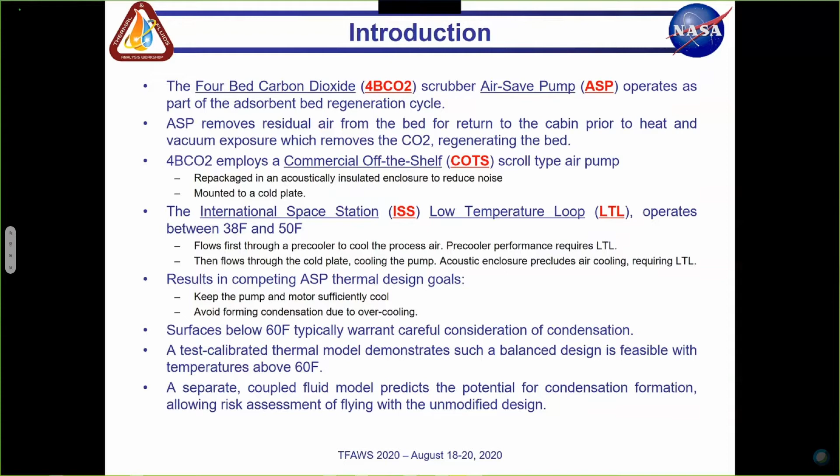We developed a test-calibrated model and used that model to investigate design changes to find a balance between those thermal goals, and did find it. And then finally, we did a condensation analysis to predict how much condensation could be formed by the pump under worst-case cold conditions.

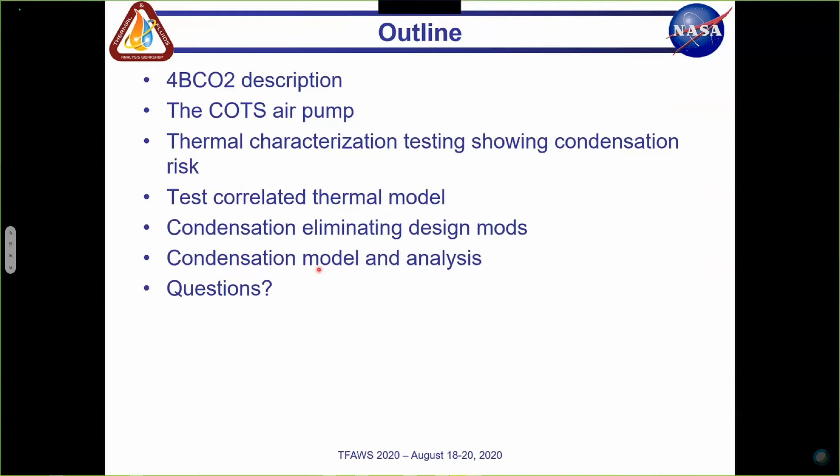So, as an outline, I'm going to show what the 4-bed system is and how it works very briefly, and describe the off-the-shelf air pump, then the characterization testing that showed the condensation risk. Then I'll talk about the correlated model and the condensation eliminating design modifications. Then I'll talk about how we tried to predict or quantify the condensation formation.

All right, so 4BCO2, it's a CO2 scrubber for EXPRESS Rack. It consists of 4 beds. There's 2 beds that absorb CO2 and 2 desiccant beds. There's 4 fluid interfaces, so it's fairly complex.

We have avionics air that cools through the rack. We have low temperature loop cooling, which runs from 38 to 50 Fahrenheit, which is pretty cool. There's process air, that's the air from the cabin that gets the CO2 extracted and then sent back to the cabin. And there's a vacuum port that's used to dispose of the CO2 that's extracted.

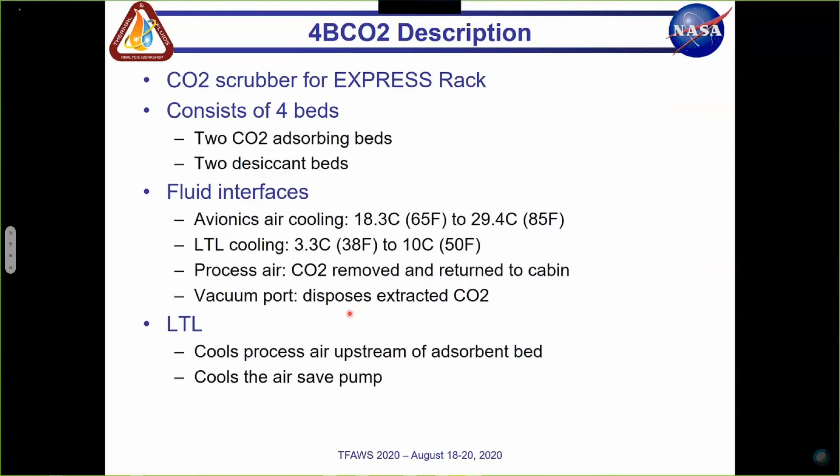The low temperature loop cools the process air before it gets to the absorbent bed. The CO2 absorbent beds work a lot better on cool, dry air. And then after doing that, the water flows through the cold plate to cool the air save pump.

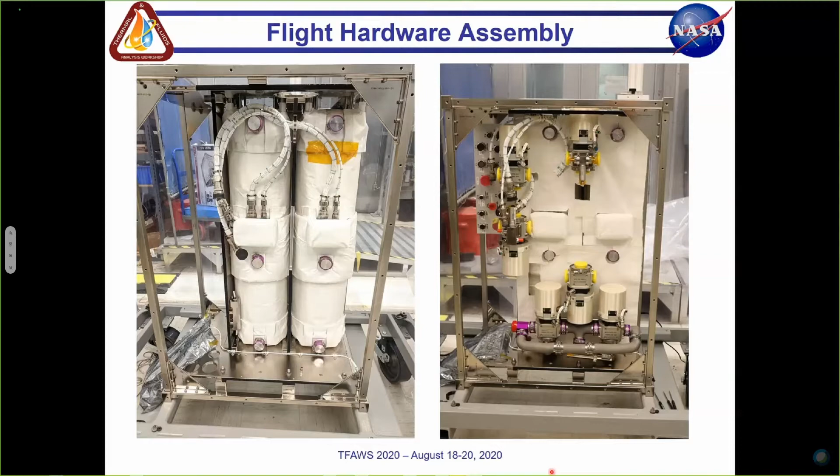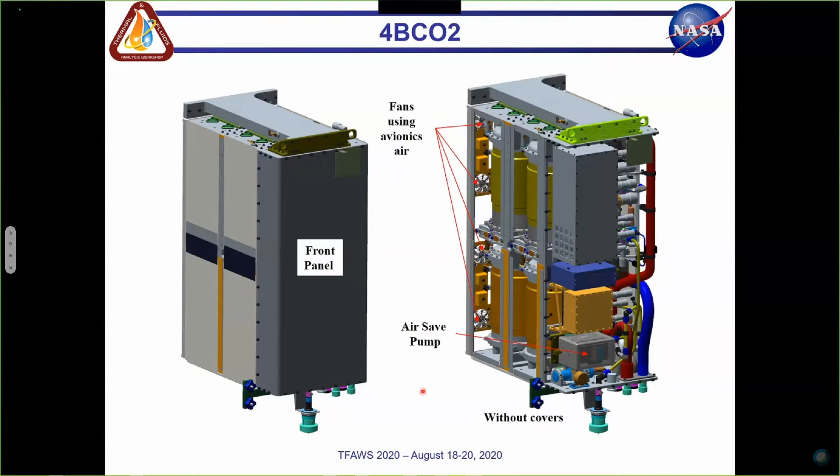The desiccant beds are on the bottom. The absorbing beds are on the top. These cylindrical soup cans are air selector valves that switch the flow between the two half cycles, which I'll talk about momentarily.

In this CAD image, we can see this is where the air save pump is compared to the front panel. Here's other avionics. Here's the beds. And here's the fans that bring air in from the avionics air cooling system.

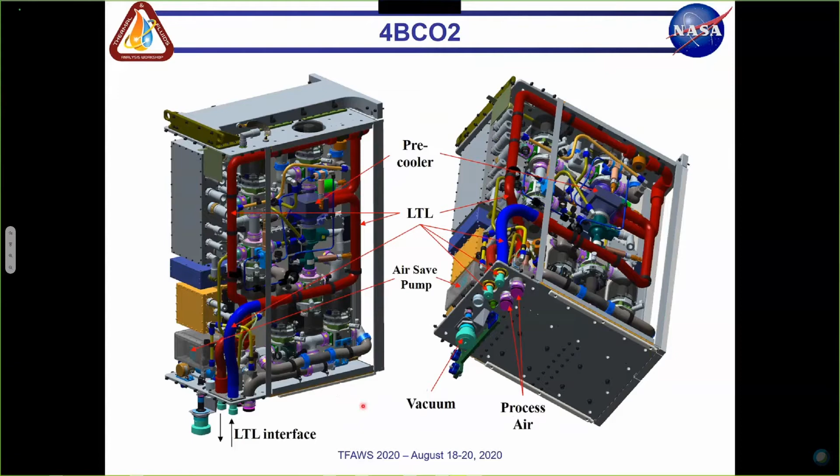In this view, we can see how the LTL flow path traces through the system. It runs through this pre-cooler, which pre-cools the process air, runs back around, comes down, cools the air save pump.

So this is the guy we're working on. The model we did for this will be integrated into a system-wide model that's still being developed.

The 4-bed CO2 scrubber operates in two 80-minute half cycles. During each half cycle, one absorbing bed is scrubbing CO2 while the other regenerates. One desiccant bed is drying the incoming cabin air before it goes to the CO2 absorber, while the other desiccant bed is rehumidifying the air before it gets back to the cabin. So the two beds are flip-flopping between these states.

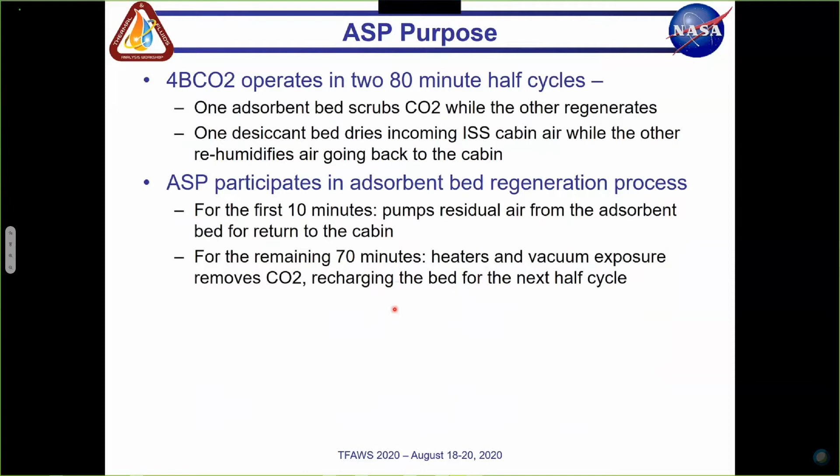The air save pump participates in the absorbent bed regeneration process. During the 80-minute half cycle, for the first 10 minutes it's pumping residual air out of the absorbing beds to return it to the cabin. Once it's in a near vacuum condition, it's opened up to a vacuum line. Heaters are turned on to drive the CO2 out of the beds, and the CO2 is thrown overboard.

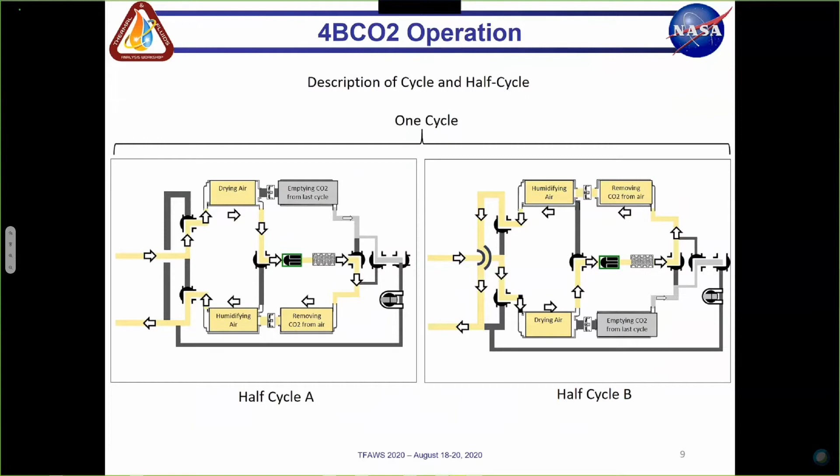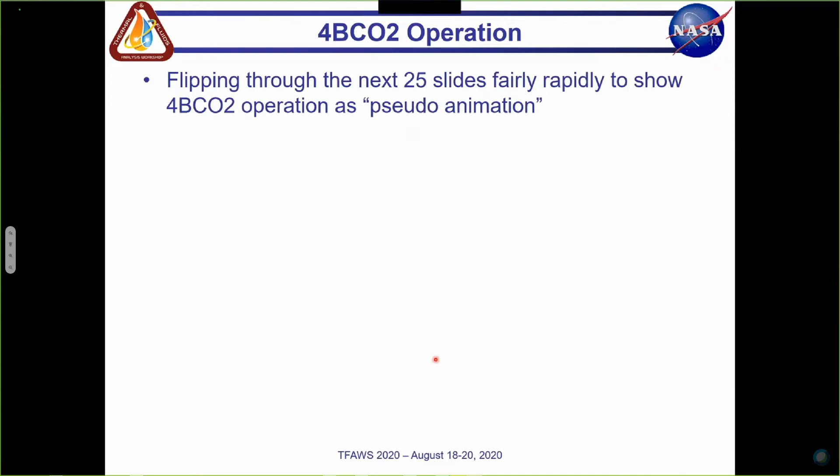These two images illustrate the two half cycles in comparison to each other. You can see how the desiccant beds flip-flop between the half cycles, and how the adsorbing beds flip-flop through the half cycles. The next 25 slides I'm going to go through at about 1 or 2 seconds apiece - it provides a pseudo animation to show how the cycles work. So I'm just going to flip through them pretty quickly.

This is an introduction to the off-the-shelf pump. This is what it looks like from the manufacturer. It's on a little carrying plate and has a fan cooling system. There's a motor control board that's integrated with the pump.

We take it off this plate, we get rid of this fan, and this board is moved - the function of this board is moved into an avionics box.

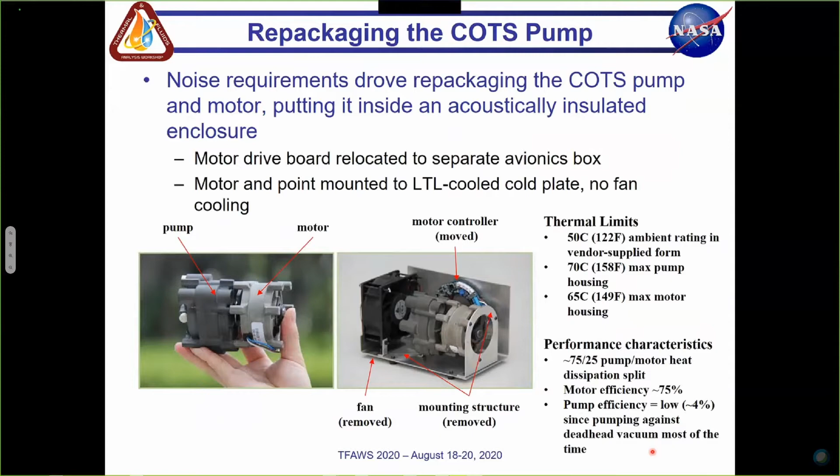The pump is rated to operate in this configuration at a 50C ambient rating. The pump case can get up to 70C, the motor case can get up to 65C. The motor is about 75% efficient. The pump is about 4% efficient because it's working against vacuum most of the time.

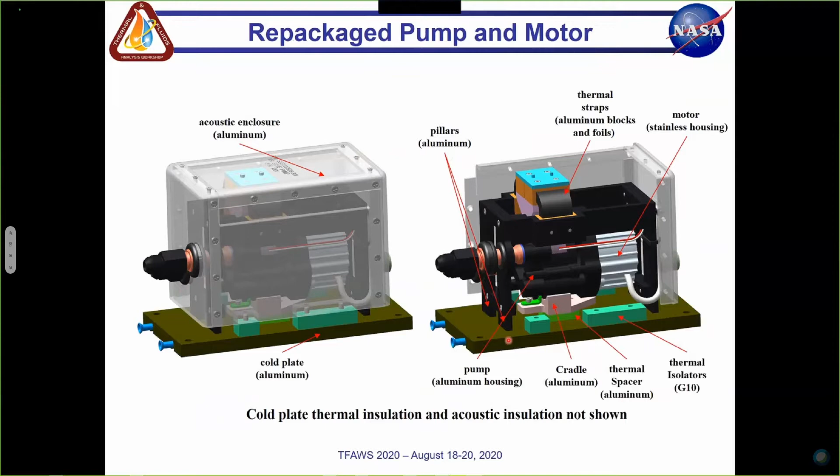In its repackaged form, it looks like this. Some insulation is not shown in the diagram, showing it with and without the cover. The pump and the motor are here. There's a cradle underneath it that mounts it through these G10 standoffs to the cold plate. A secondary cooling path comes up through this cold block to these thermal straps and then down through these pillars to the cold plate.

For humidity assessment, we're using the humidity temperature envelope from SSP 57000. We're extrapolating this red box over to about 30 degrees C to apply inside the rack. We don't really have any inside-the-rack temperature humidity envelope, so we use the cabin condition.

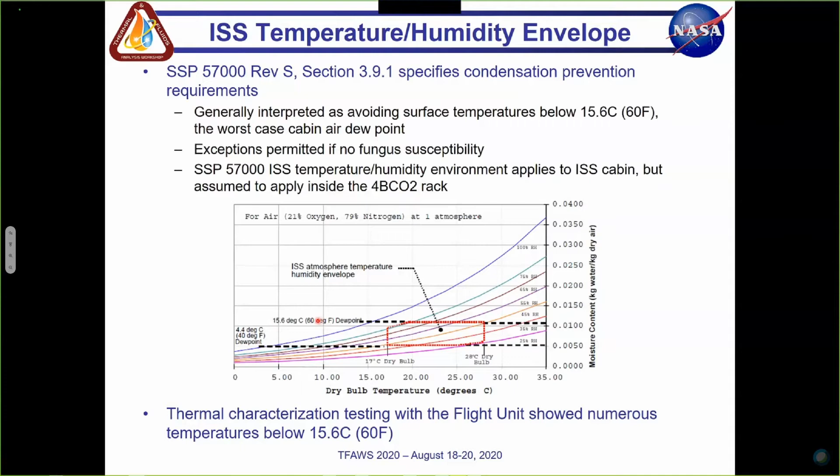Typically you don't ever have any more than 75% humidity or a 60-degree dew point. So that's why 60 degrees is kind of a critical temperature - anything getting below 60 degrees has to be looked at in terms of a condensation threat.

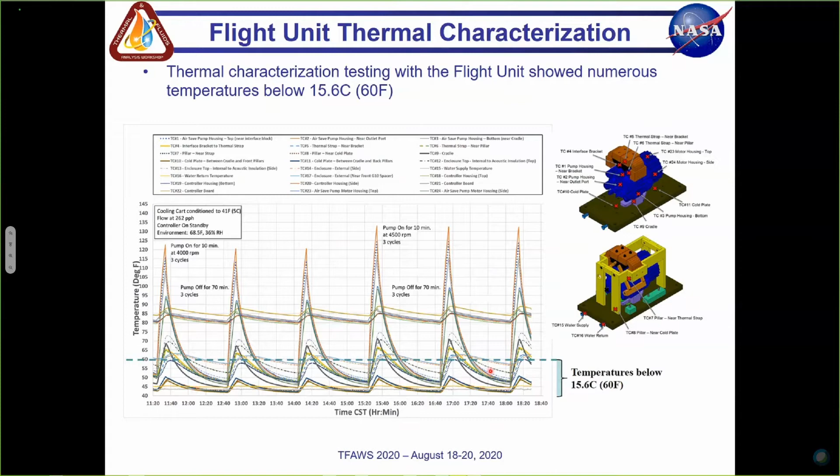During testing with the flight unit, this is a summary, everything on one graph. These temperatures are for the controller, and the rest of the temperatures are for various locations on the pump illustrated here. The main point on this graph is that we have a lot of temperatures that are below 60 Fahrenheit, so this all is a possibility for condensation and has to be addressed.

So this creates a thermal conundrum. If the pump had been flown in its commercial configuration, we could have just made sure that the air around it is below 50C. And since the rack air is less than 100% relative humidity, and the pump's always warmer than the rack air, there would never be any condensation.

But because we put a cover on it and stuck it on a cold plate, we have to consider the condensation. And it creates the competing thermal demands of keeping the pump cool enough, but not so cool that we start making moisture, liquid water.

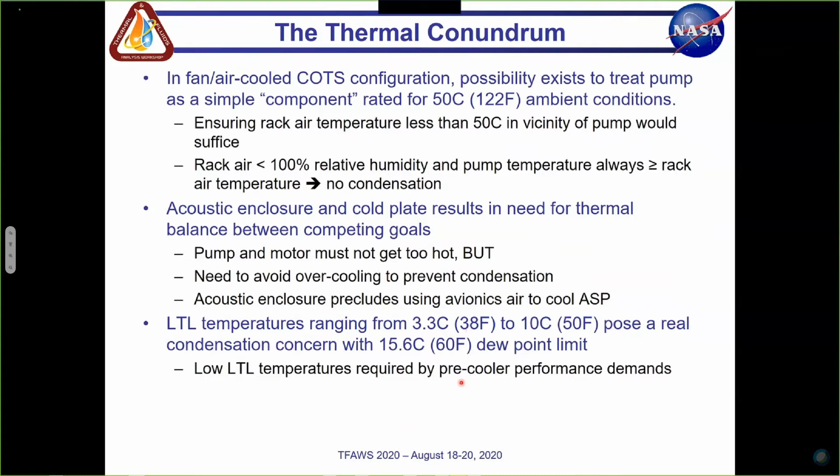The LTL temperature ranges from 38 to 50 Fahrenheit. The pre-cooler can warm that water by as much as 10 Fahrenheit, but that's not a hard number - don't know how much confidence to put in it. We had a lot of difficulty with the testing of the pre-cooler heat exchanger.

So in the analysis, we made a thermal desktop model of the air save pump, which will later be integrated into the system model. This model was dialed in to agree with the transient test data.

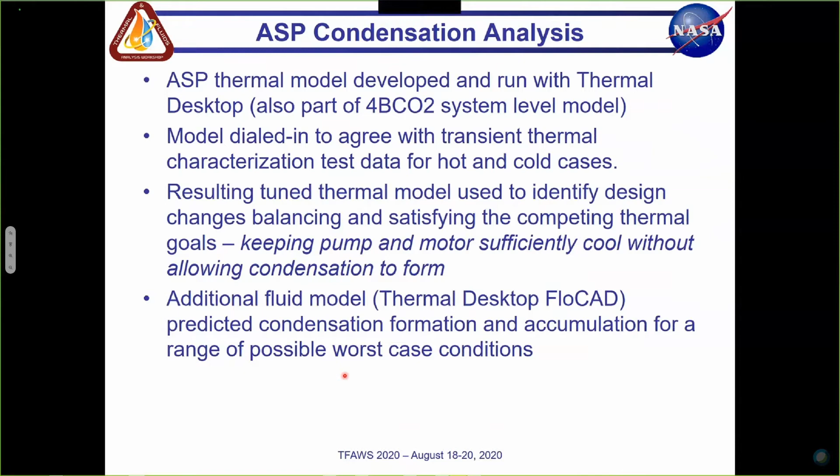The resulting model was used as a virtual test bed to figure out what kind of design mods might strike the balance between these competing thermal design goals. And then we did an additional fluid model to try to quantify the potential for condensation formation.

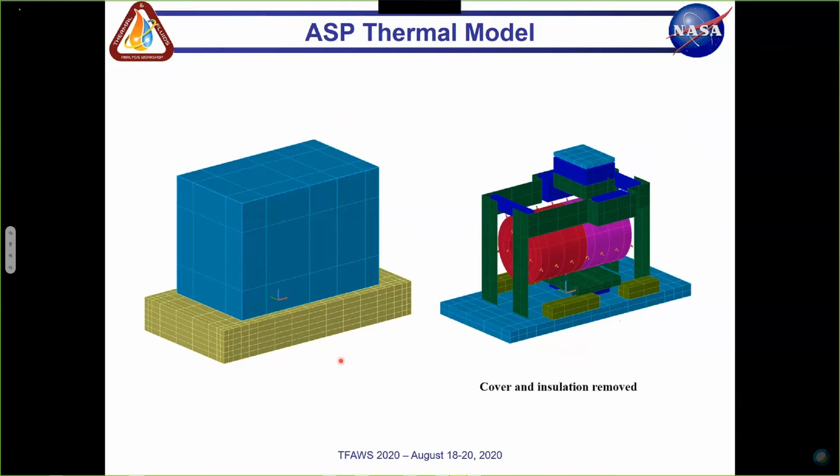This shows the thermal desktop model, with the insulation around the cold plate removed on the right. The cover has been removed to show the simplified geometry used for the model. We tried to keep the node count down, since we didn't really need high geometric fidelity to get believable and useful answers.

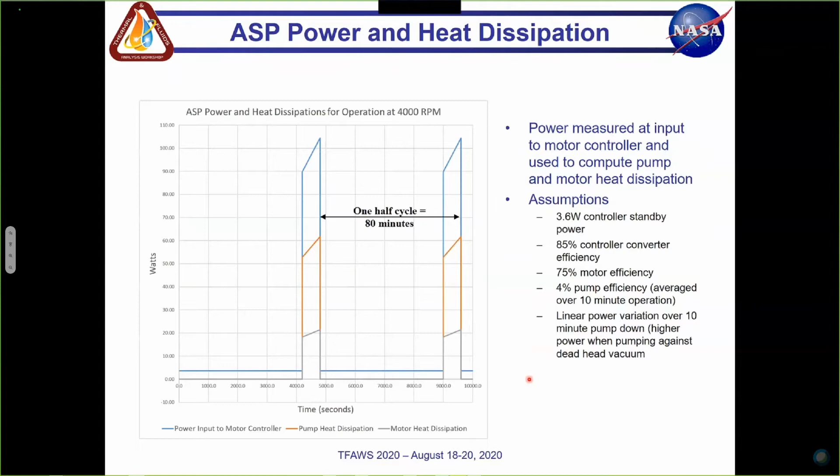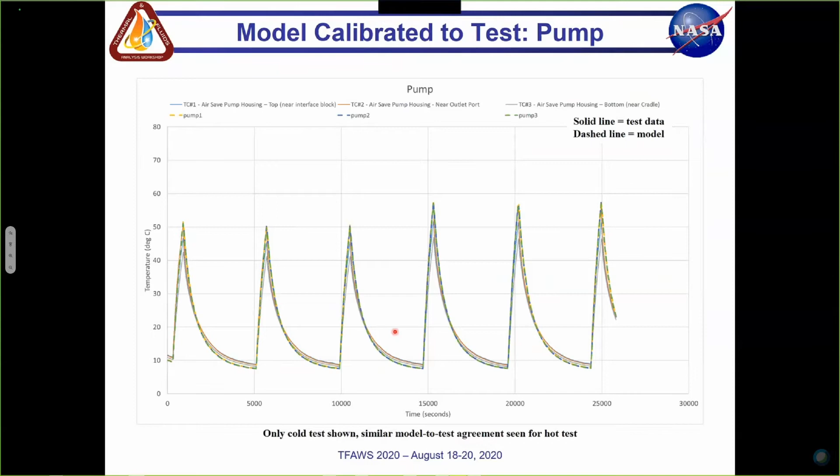We know the controller has 3.6 watts of standby power, and we had to use these assumed efficiencies to calculate the heat dissipation. Measuring the electrical input to the motor was really difficult. It's a DC motor, but that's DC input to the controller board. The controller board delivers three-phase pulse width modulated power to the motor to control it, and it's extremely difficult to make direct power measurements off that kind of electrical line.

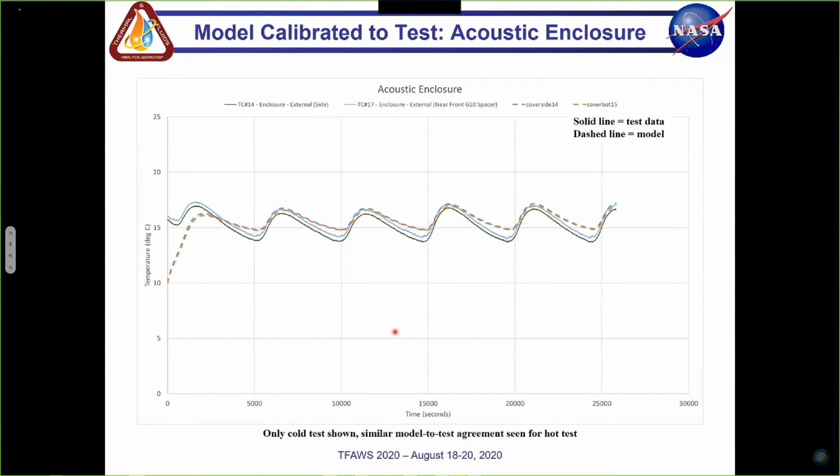For the next few graphs, I'm showing how the tuned model agrees to the test data. I'm just going to flip through them, but the dotted lines are the model, and the solid lines are the test data.

With this model, we came up with a hot case and a cold case. For the cold case, we were looking at condensation formation. For the hot case, we're trying to make sure the pump and the motor don't get too hot.

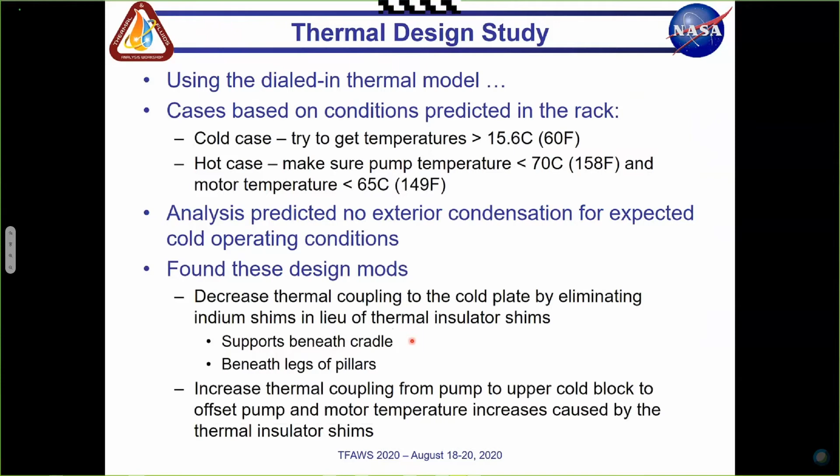We found that by decreasing the thermal coupling between the motor and the pump and the cold plate, we could get things warmed up. But that also warmed things up so that the motor and the pump in particular was running a little hotter than we wanted.

So an additional tweak to another thermal interface offset that and brought that temperature back down. We found that putting the equivalent of a 20 mil G10 shim under the standoffs under the cradle, and putting the equivalent of a 40 mil G10 shim under the feet for these pillars in 4 locations, would get the temperatures up to where condensation shouldn't happen.

Then by increasing the thermal interface between the pump and this upper cold block, we could get the pump temperature back down to within its temperature limits.

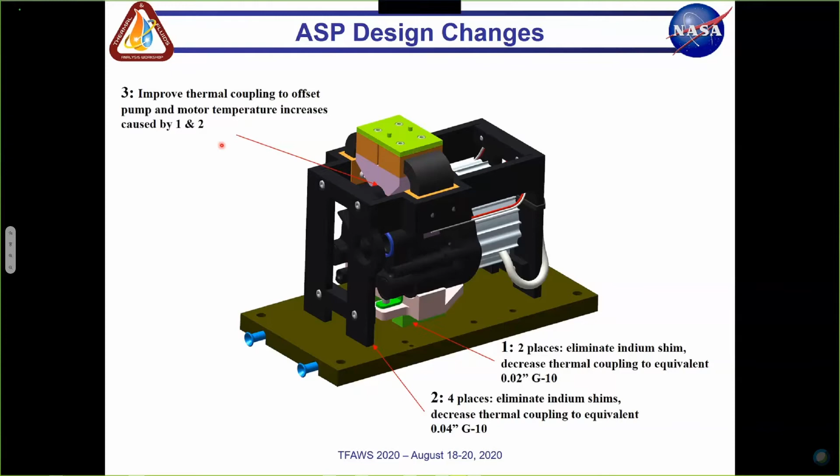In the tuned model, I had assumed that there was a 10 mil air gap in this region, and cutting that in half to a 5 mil air gap is what I actually did in the model. With that model, we had happy pump temperatures, happy motor temperatures, and those surfaces predicted to be above 60 degrees. So that turned out to be a happy design that struck the balance between the competing thermal design goals.

Unfortunately, the project decided not to modify the flight unit because it was too late. They didn't want to break configuration and open it up. They also did a material analysis that showed we didn't have any fungus susceptible materials.

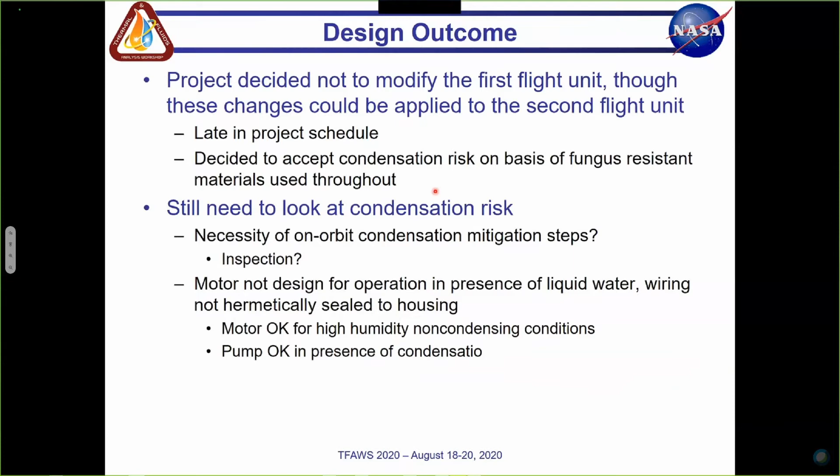The requirements permit you to have temperatures below 60 with condensation if there's no risk of fungal growth. But we still needed to look at the condensation risk because it has potential operational effects on the motor. The motor is not designed to operate in liquid water, though it is designed to operate in high humidity. The wires are not hermetically sealed to the housing. So we still needed to know something about how much condensation could form and under what conditions.

To do that, I created a Thermal Desktop FloCAD model, a very simple model. This represents the 80 cubic inch volume inside the acoustic enclosure. This represents a boundary node with a surface area average temperature taken from the model, used as a boundary condition.

This fluid tie connects the air in this volume to all these surfaces based on a surface area of about 350 square inches. This plenum represents the air in the rack. We chose the most moisture-laden condition, so the warmest rack condition with the coldest cold plate condition, which turns out to be 43% relative humidity nominally. We use an extreme worst case of 75%.

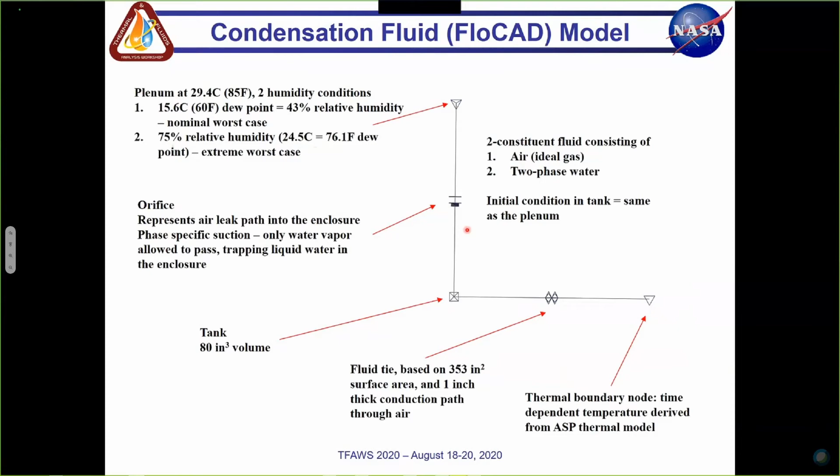This orifice represents the leak between this volume and the plenum. The leak was set up to be a phase specific leak. In other words, it would permit water vapor to pass through the leak, but it would trap liquid water inside the enclosure.

This shows the average surface temperature inside the enclosure for two different conditions. The blue line represents the predicted average temperature for when the pre-cooler is operating and giving us our 10-degree Fahrenheit boost to the water temperature. You can see that stays above the 60-degree line, so you wouldn't expect to really have a condensation issue with that, at least not in the global average sense.

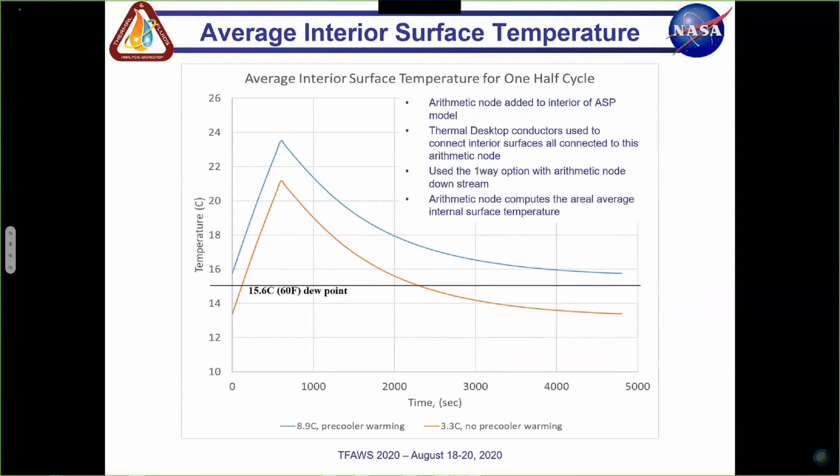Could still have little spots of it, because an average temperature consists of temperatures both above and below the average. The orange line represents a more extreme worst case where we ignore the effect of the pre-cooler, and in this case you can see temperatures get below that dew point line. So this is the boundary condition used on this node.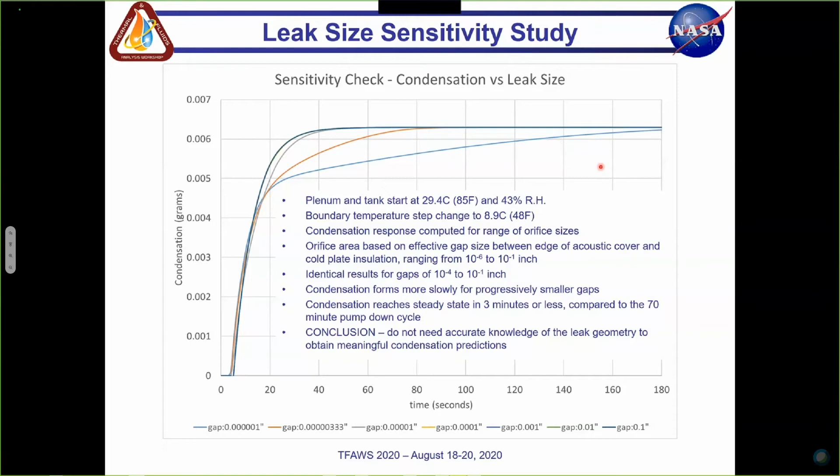And for the extreme smallest gap, I got this blue line. Even with this most extremely small gap, I'm still reaching the steady state condensation in 3 minutes. The pump is off for 70 minutes, so the window of opportunity for forming condensation is 70 minutes long, and it's going to do whatever it's going to do in about 3 minutes. The takeaway conclusion from this is that I don't need to know the leak characteristics accurately in order to get a meaningful prediction, so I didn't really spend a lot of time worrying about not knowing what the leak looked like.

So here's 3 cases. I used three different analysis assumptions. They're all cold cases, all more or less worst case. We have a mild worst case, a medium worst case, and an extreme worst case. In the mildest worst case, we don't have any condensation form. In the medium worst case, we have some condensation forming, but then it evaporates during the 10 minutes of on time. It forms again and evaporates, so it's drying itself off on each 80-minute half cycle.

And in the most saturated, wet, worst case, there's more condensation formation and not enough time to get it to zero. So each time it evaporates less than is formed, and over time you can see the curve is ramping up gently. There is a condensation accumulation.

So I ran the model for 200 cycles instead of 10 cycles to see what I would get, and basically I'm seeing the same result. If I take this curve and extrapolate it out to a 3-year mission life, it turns out I've got about 9 grams, 9 milliliters, or a little less than 2 teaspoons of condensate formation. So even under the most extreme, damp, worst case, cold, hot, juicy ambient conditions, I still have a very small amount of condensation forming.

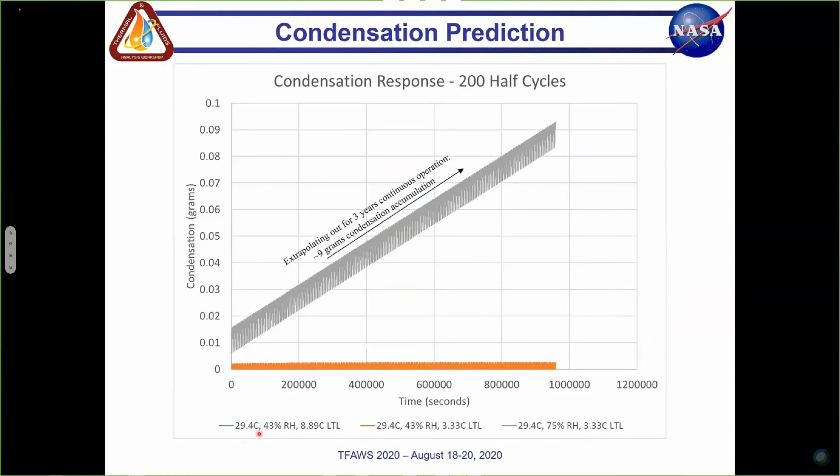In this case, it's drying itself each time. In this case, I'm not having any formation. I got this backwards - this is the least severe, so the blue line is hidden down here under the orange line. This is probably more worst case than reality.

So the three conditions were an 85-degree Fahrenheit ambient inside the rack with 43% relative humidity, and I included the pre-cooler effect of warming the water by 10 degrees. Then we had the same rack ambient conditions, ignoring the pre-cooler effect. And then we took the same rack temperature, assumed it was 75% relative humidity, and still ignored the pre-cooler effect.

In this case, no condensation. In this case, it dries itself out on each cycle. And in this case, 2 teaspoons of water after 3 years operation under these super extreme worst case conditions. So the conclusion I got from this is that condensation is unlikely to form. The risk of condensation falls between 0 and very small.

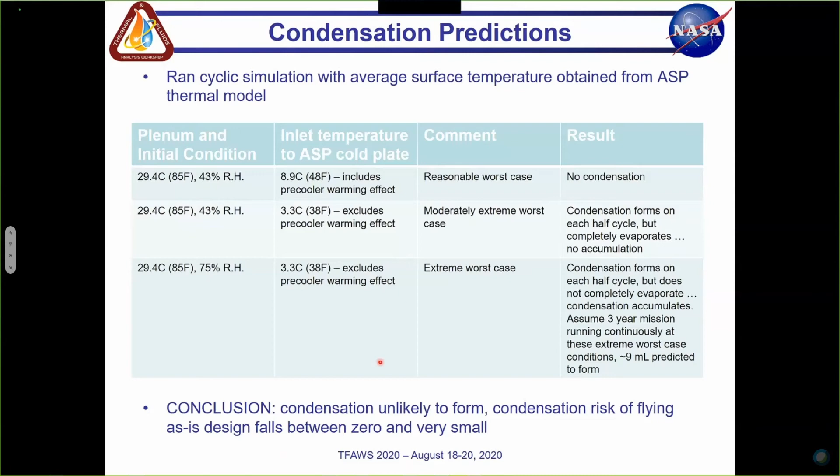Another conclusion that the project had was later, during a hardware upgrade, they would take the top panel off of the acoustic enclosure and actually inspect the system to see if there's water formation inside. I don't think they're going to see any.

Here's a few references. Excuse me a moment.

And I want to have an acknowledgement to Warren Peters at Marshall ES62, who created the cycle diagrams that led to the pseudo animation. I know a lot of work went into that, and I couldn't have done it.

Anyway, that's it. And I guess we got time for questions.

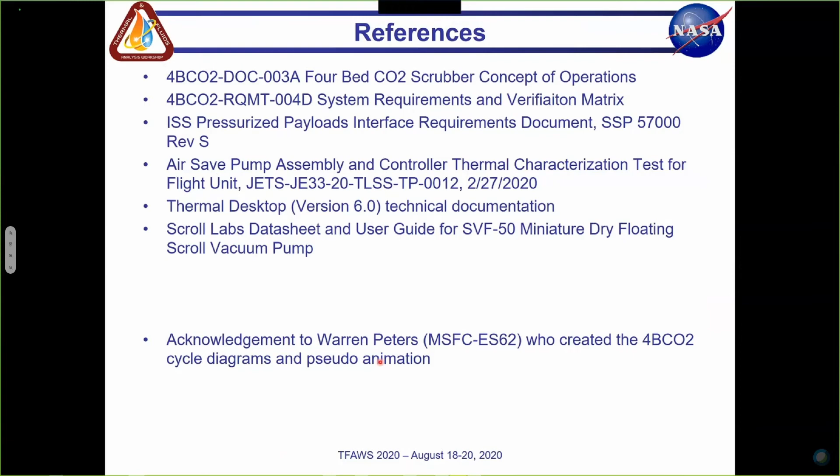Thank you, Dan. That was an excellent presentation. I know I went kind of fast, but it's 60 pages and 20 minutes, so I had to go fast. Yes, I'm impressed that you made it all the way through. Honestly, if anybody has questions later, my email is at the beginning of the presentation. I should have put it at the end.